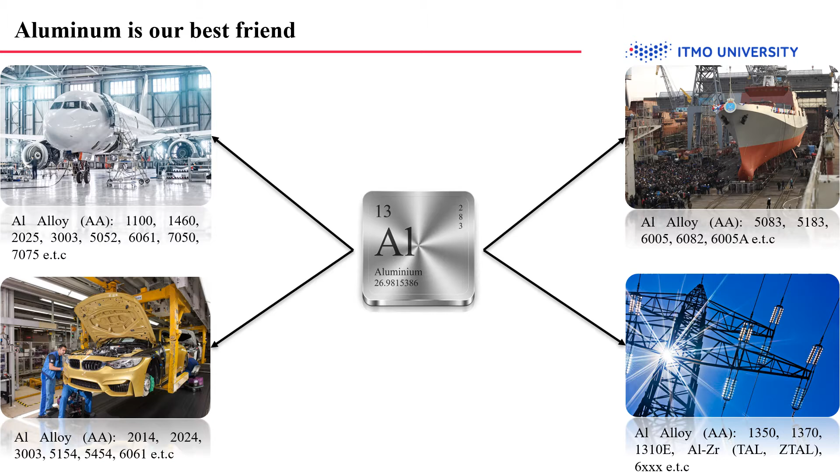I would especially like to note the extremely high applicability in the electrical industry. According to some data, from 13 to 18% of all aluminium produced is used in this area. Therefore, nowadays special attention is paid to developing electrotechnical or conductive alloys with outstanding properties.

First of all, aluminium alloys are used in cables for air power lines. However, there is the key problem: this is low strength of aluminium and its alloys. Therefore, to create long wires, aluminium is reinforced by a steel core. That leads to an increase in electrical resistance, an increase in the cost, and makes the constructions heavy.

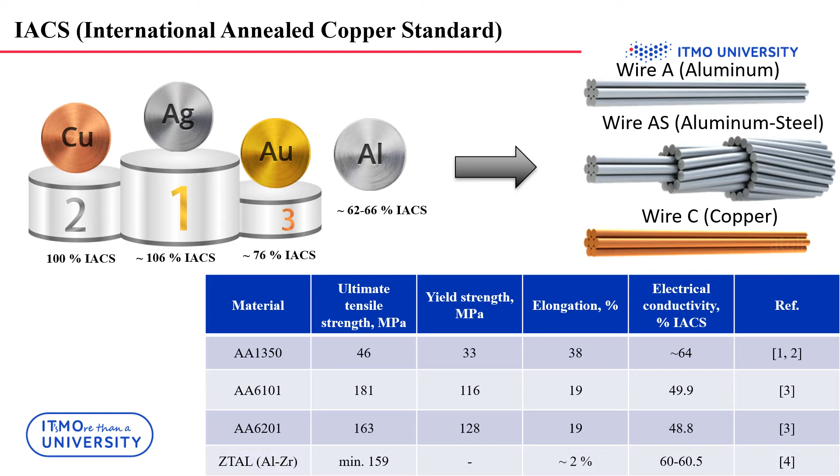In this regard, in recent decades, in addition to standard alloying, the approach to create ultrafine-grained and nanocrystalline structures by methods of severe plastic deformation has been increasingly used, since, in accordance with the Hall-Petch relation, grain refinement provides an increase in strength. Briefly, such an approach is usually called design of microstructure.

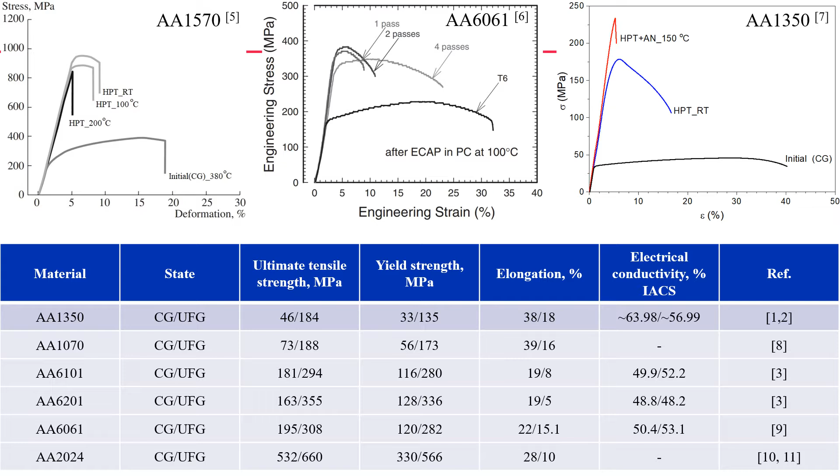SPD structuring leads not only to an increase in strength, but also strongly reduces the ductility of UFG materials, which greatly limits the scope of their functional application.

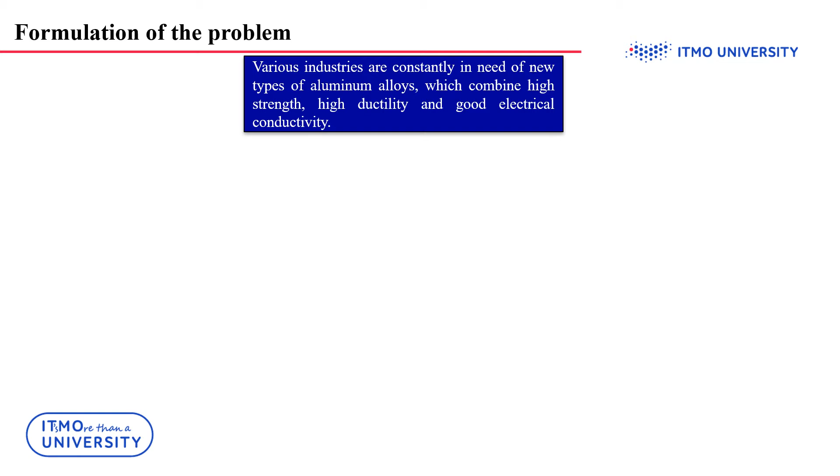So, various industries are constantly in need of new types of aluminium alloys, which combine high strength, ductility, and, in the case of electrotechnical applications, good electrical conductivity. To achieve this goal, the selection of optimal alloying parameters and design of the microstructure are carried out.

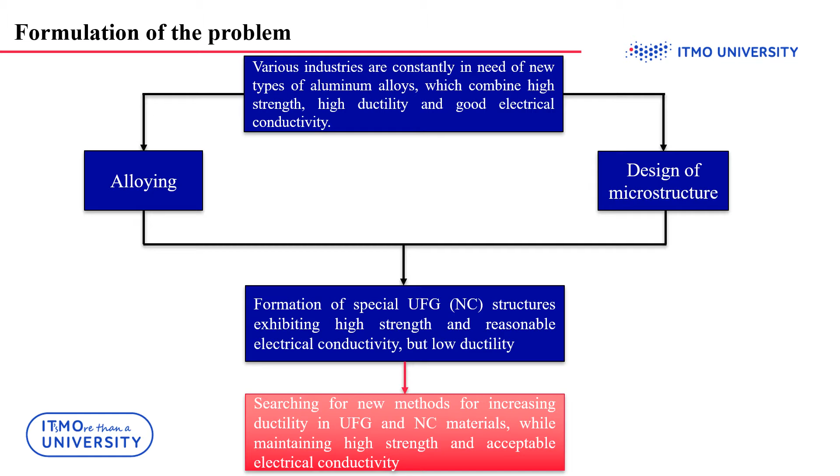Such special UFG or NC structures have high strength and acceptable electrical conductivity, but usually low ductility. From here comes the task to search for methods of increasing ductility of UFG and NC materials while maintaining high strength and acceptable electrical conductivity.

Recently, it was found that special additional deformation heat treatment, or just DHT, consisting of low temperature annealing plus additional small high pressure torsion deformation, provides a significant increase in ductility of high pressure torsion processed aluminium while maintaining a high level of strength. This deformation-induced increase of ductility is not typical for coarse-grained metals.

A theoretical model was proposed to explain this plastification effect, or just PE, in UFG aluminium. According to this model, during the additional deformation, an additional density of extrinsic grain boundary dislocations is introduced into the structure of high-angle grain boundaries, relaxed after annealing, that leads to facilitating the emission of dislocations from grain boundaries.

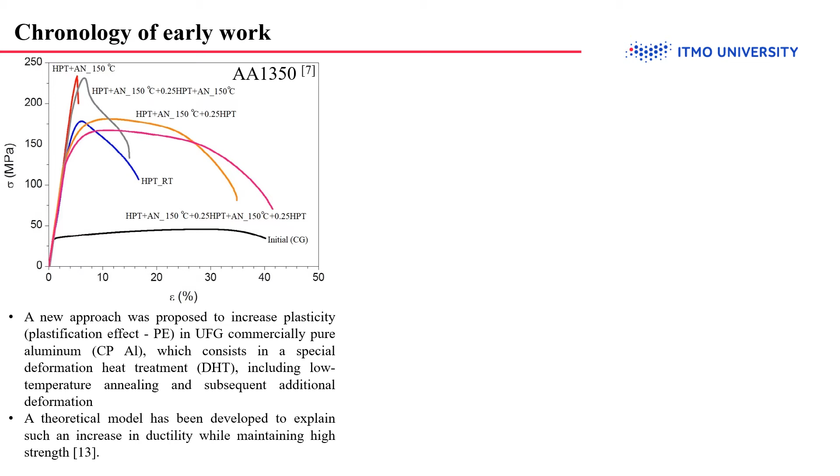Then, a similar effect was found for aluminium-copper alloy structured by the HPT method. The next step was to study the effect of similar deformation heat treatment on the physical and mechanical properties of the new, perspective UFG aluminium-copper-zirconium alloy.

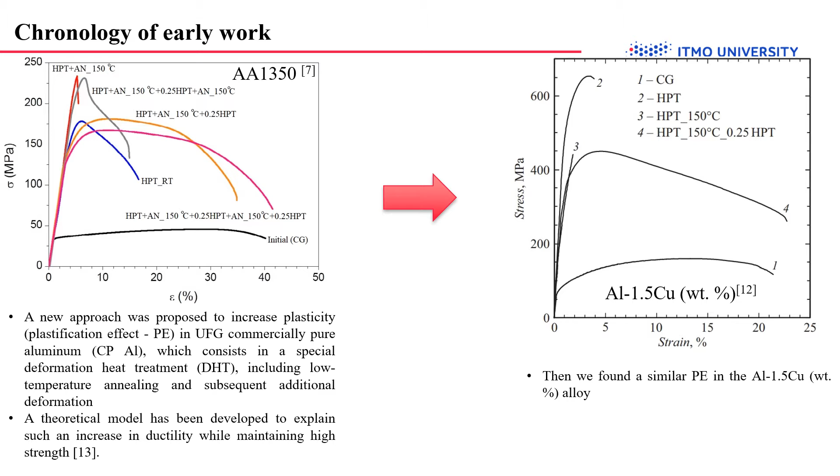Zirconium was introduced to form metastable precipitates of the aluminium-3 zirconium phase to provide the thermal stability of the mechanical properties of the alloy at elevated temperatures.

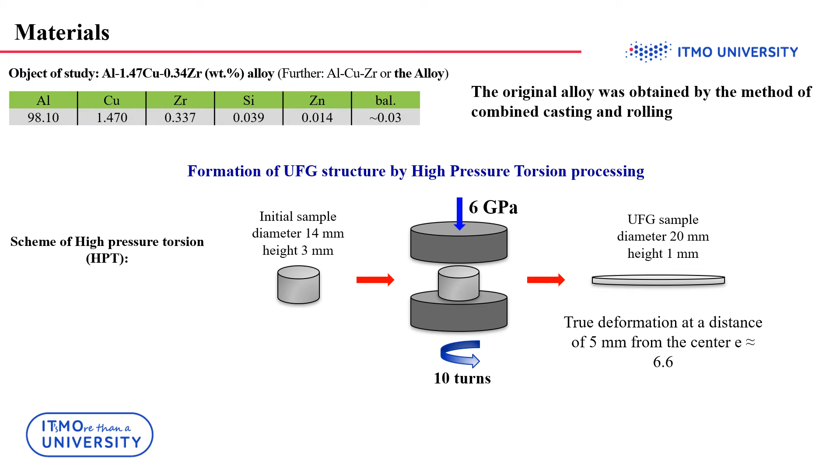The chemical composition of the studied aluminium-copper-zirconium alloy, for simplicity we'll call it just the alloy, the method of its obtaining in the initial coarse-grained state, as well as the scheme and parameters of UFG structuring using the HPT method are shown here. The initial coarse-grained state was obtained by the method of combined casting and rolling.

Artificial aging at these parameters was carried out for homogenization and formation of precipitation of nano-sized metastable phase of aluminium-3 zirconium. The UFG structure was formed by high pressure torsion at room temperature.

A part of the HPT processed specimens was annealed at various annealing parameters in order to study the effect of annealing on the physical and mechanical properties of the UFG alloy. Finally, after annealing, the effect of a small additional HPT deformation on the strength properties of the alloy was studied.

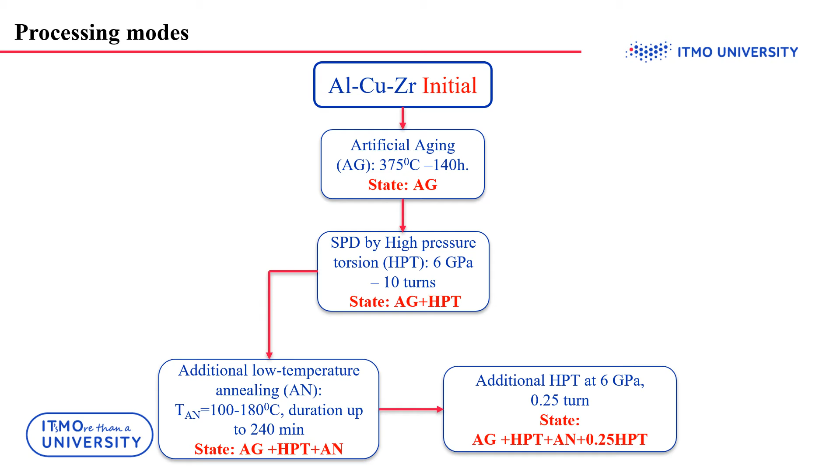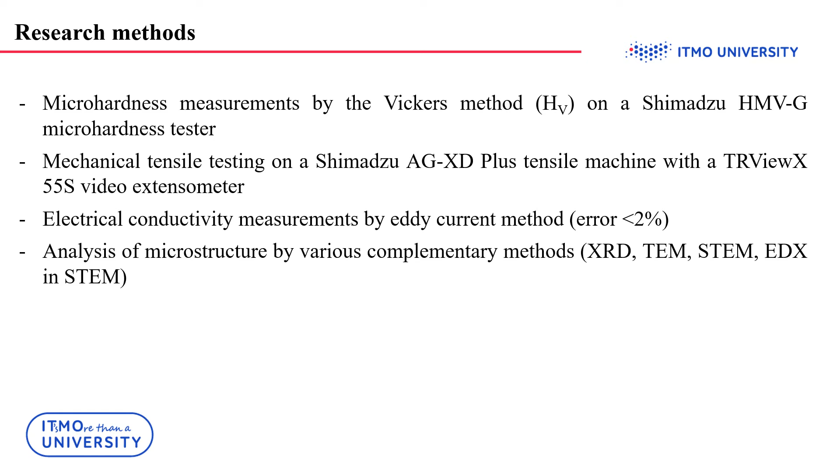Mechanical properties were measured by conducting uniaxial tensile tests and microhardness measurements. The electrical conductivity was measured by the eddy current method. The study of the microstructure was carried out by various complementary methods.

Conducting HPT led to a dramatic increase in strength characteristics. Tensile strength increased by 2.7 times and yield strength by 2.3 times compared with the AG state, while maintaining a fairly high electrical conductivity. At the same time, as expected, the ductility strongly decreased to 4.9%.

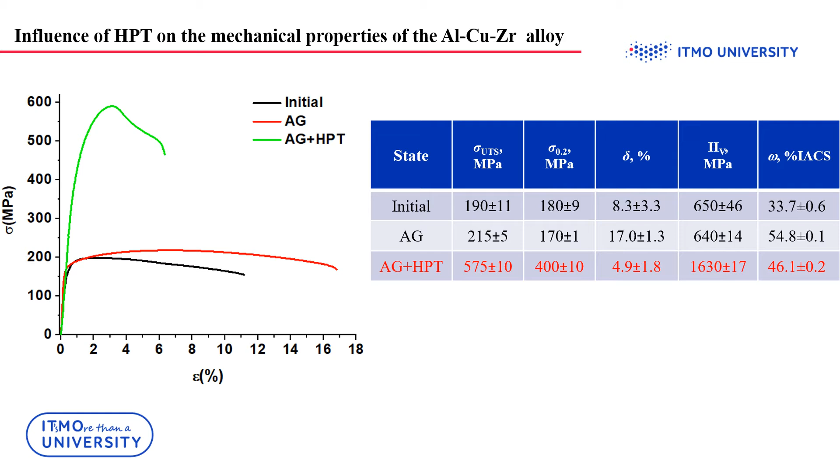The transmission electron microscopy analysis of the microstructure of the alloy in the AG state showed that the average grain size is 630 nanometers. The presence of a significant number of precipitates of the aluminum-zirconium phase, located both along the grain boundaries with average size 35 nanometers and in grain interior with average size 9.3 nanometers, was revealed.

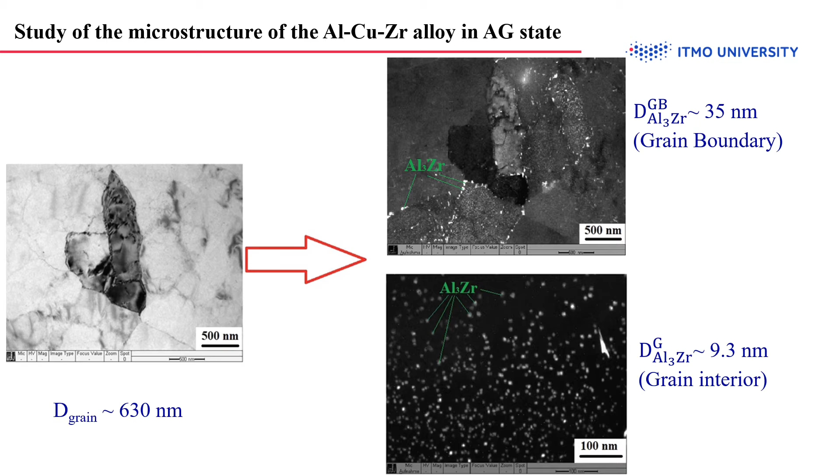The highest electrical conductivity of the studied alloy, 54.8% IACS, was achieved by purification of the aluminum matrix from solute alloying atoms in the process of artificial aging. HPT processing led to the formation of an UFG structure with an average grain size of 285 nanometers.

The number of aluminum-zirconium precipitates substantially decreased, however the average size increased to 18 nanometers. The precipitates of aluminum-zirconium predominantly located in the grain interior, pointing to partial deformation-induced dissolution of these precipitates.

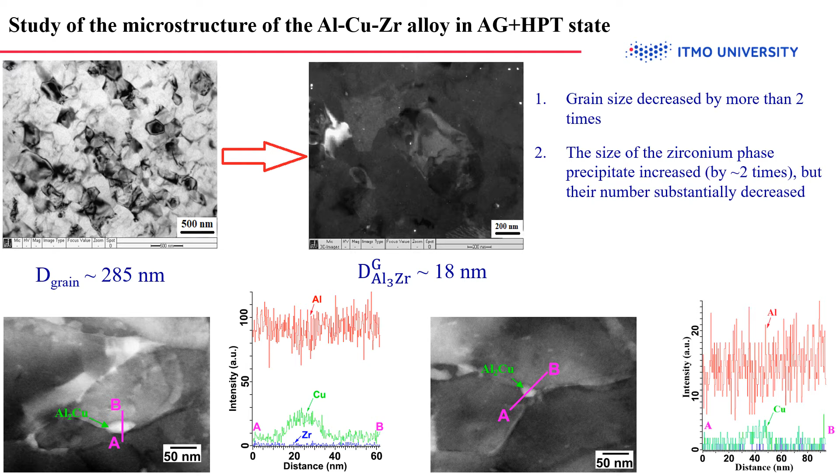At the grain boundaries, copper-containing precipitates, aluminum-copper phase with an average size of 20-40 nanometers, are clearly observed. Their belonging to the copper phase was confirmed by microdiffraction images and EDX analysis in STEM.

In order to obtain optimal annealing parameters, the study of annealing kinetics was carried out. It was found that the best combination of microhardness and electrical conductivity is achieved after annealing at temperature of 125 degrees Celsius for 2-4 hours.

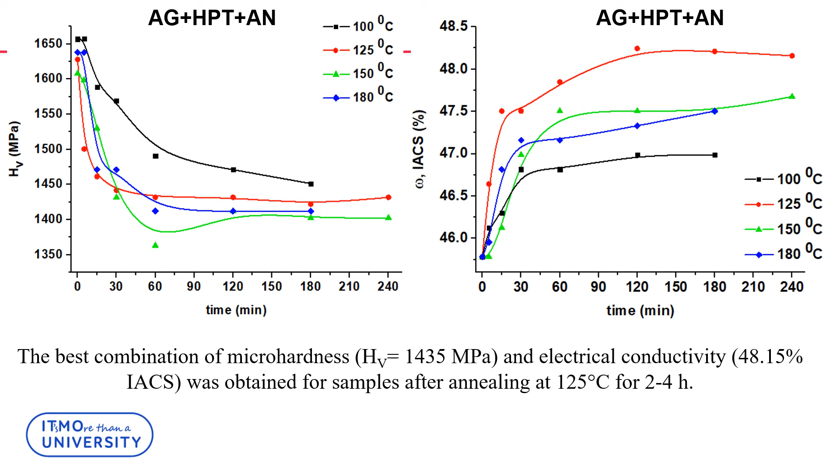This state was chosen for tensile test. As we can see, the state after additional annealing demonstrates still a good tensile strength, about 485 megapascal, but very low ductility, less than 2%.

However, we found that subsequent additional small HPT deformation by a quarter of a turn leads to a substantial increase in ductility, while the high level of strength is kept. Thus, we see that the proposed deformation heat treatment leads to a significant increase in ductility while maintaining high strength and reasonable electrical conductivity in the studied alloy.

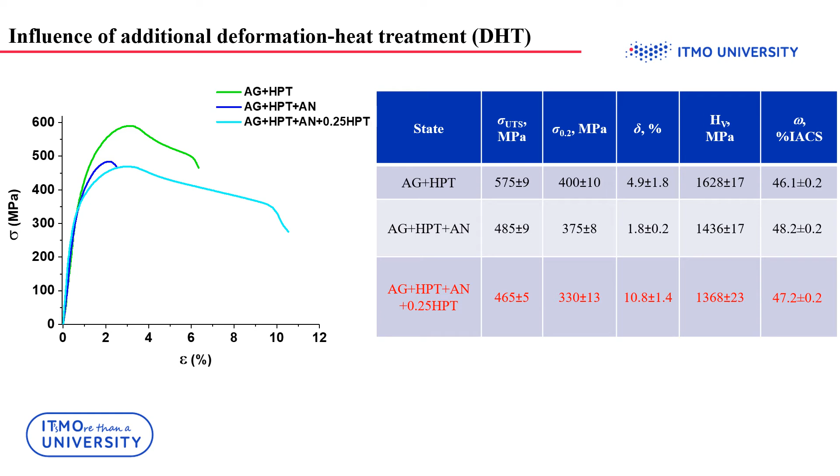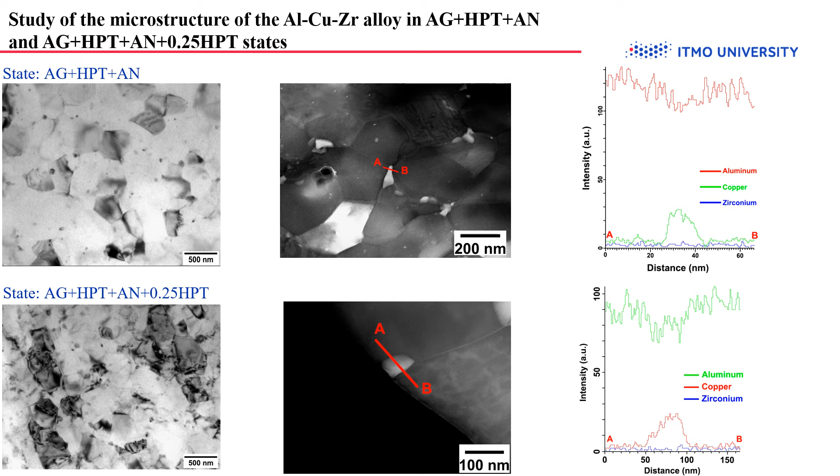To better understand the observed phenomenon of increasing ductility by deformation, we studied microstructure of alloy after annealing and subsequent deformation. It was found in both states the grain size remained practically unchanged. At the grain boundaries there are still precipitates of the copper phase, the size of which increased to 60 nanometers. The main microstructure change is decrease in dislocation density after annealing and substantial increase of it after subsequent additional deformation.

In this regard, the obtained effect of plasticization can be well described by the physical model proposed by us earlier for commercial pure aluminum. According to this model, plastic deformation in UFG aluminum structured by HPT is carried out by the emission of lattice dislocations from triple junctions.

The low plasticity in the state after short-term low-temperature annealing is explained by a decrease in the grain boundary dislocation density. As a consequence, an increased external stress is required for the emission of dislocations from grain boundaries, and a decreased number of lattice dislocations is emitted from grain boundaries.

An increase in plasticity in the state after annealing and subsequent small deformation is associated with the introduction of an additional dislocation density in grain boundaries, which leads to an increase in the number of dislocations capable of forming pile-up under applied external load. In addition, it is worth noting that after DHT, the dislocation structure of the grain boundary itself may differ from that in the AG plus HPT state.

That may affect the formation of pile-up of grain boundary dislocations under applied external stresses.

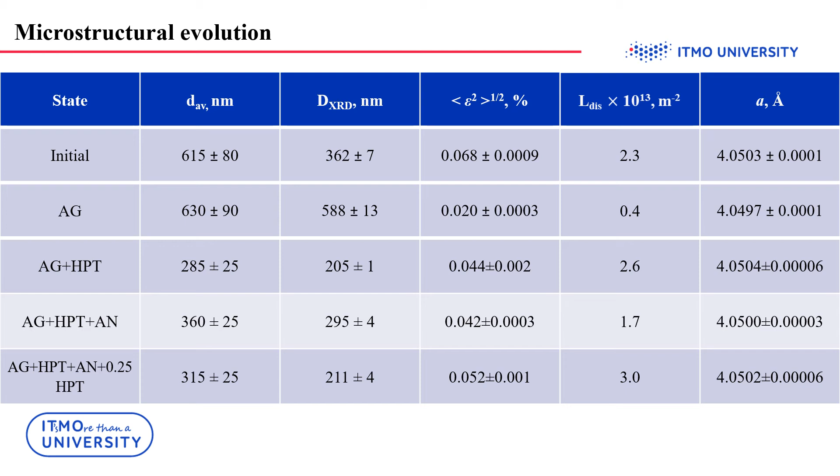However, it is known from the literature that some UFG aluminum alloys exhibit increased plasticity and even superplasticity in some cases due to the significant contribution of grain boundary sliding, or just GBS, to the total plastic deformation. Such intensification of GBS is usually associated with a rather large value of coefficient of strain rate sensitivity. In this regard, the influence of the strain rate on the observed effect of plasticization was investigated.

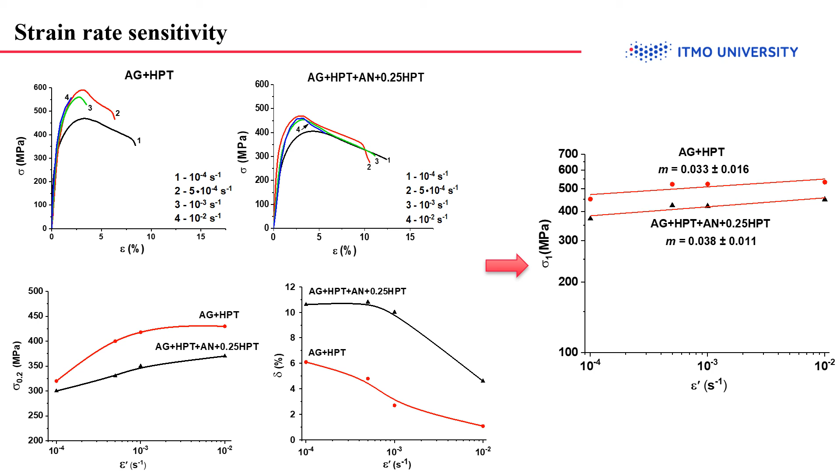Summarizing my talk, a comprehensive study of the influence of structuring of aluminum-copper-zirconium alloy by the HPT processing on the strength, ductility, and electrical conductivity has been carried out. It was shown that HPT treatment leads to an increase in tensile strength by 3 times. Such hardening is due to the grain refinement and formation of copper-containing nanoprecipitates at the grain boundaries.

It was found that low temperature short-term annealing and small additional deformation leads to a good combination of high strength and high ductility with reasonable electrical conductivity. The obtained enhanced plasticity of aluminum-copper-zirconium alloy is kept in a wide range of strain rates and strongly decreases at higher strain rates.

It was found that the value of the strain rate sensitivity coefficient is not high and about the same in both states of the UFG alloys, before and after the treatment of annealing plus deformation. Hence, grain boundary sliding was concluded not to play a key role in the effect of increasing plasticity.

The plastification effect can be explained within the model, according to which the increased plasticity is associated with the introduction of an additional extrinsic dislocation density in the grain boundary structure, that facilitates formation of grain boundary dislocation pile-ups and emission of dislocations from grain boundaries under external loading.